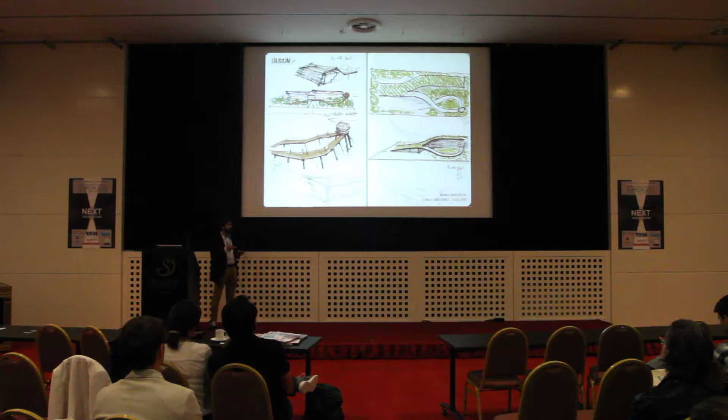So these are initial sketches showing our intention to use the whole site as a park and to use the water tower. And there were two other very important elements that we wanted to incorporate into our design. First of all, the inner street, like the one I showed you, the Long Bazaar, where all the inner circulation will be solved.

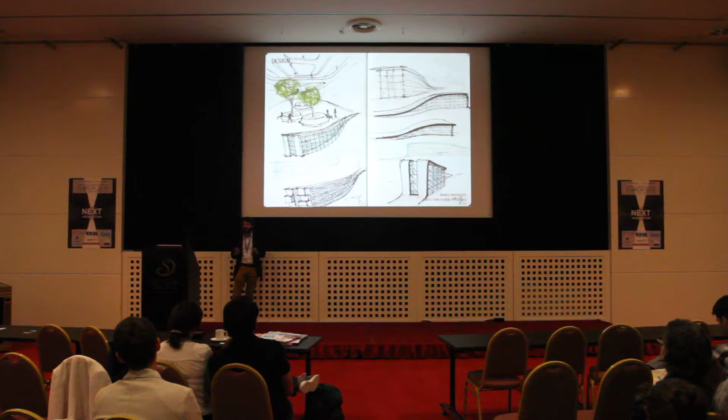And the second one is transparency, literally by means of a transparent glass facade connecting visually inside and outside, and symbolically emphasizing the transparency of the state apparatus, which is a bit problematic in Turkey, unfortunately.

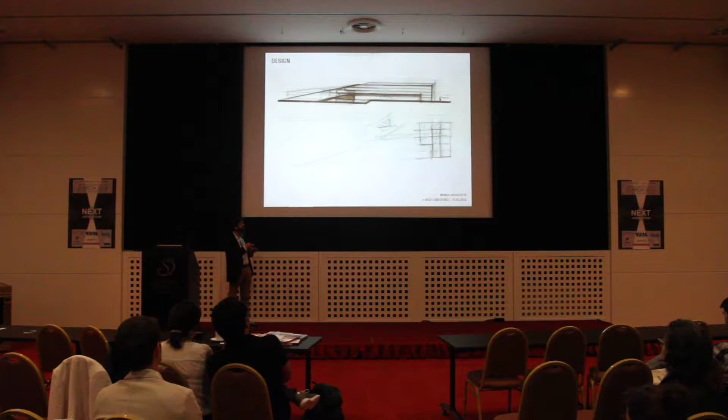So while developing the design, we found out that we could carve out 2 stories from the building mass. This is a section, and create a shaded colonnade, like in the traditional architecture. And in that way we could also visually connect the inner street and the park. So this is a 3-dimensional sketch of it.

And in the end, what we did was we sliced off the middle portion of the building mass and created a big atrium space, a gallery space above the inner street.

And we also lifted off this northern wing of the building by taking out the 2 stories here facing the park area. And then we covered the resulting void with transparent glass in order to achieve an illuminated interior as well as visually connecting inside and outside.

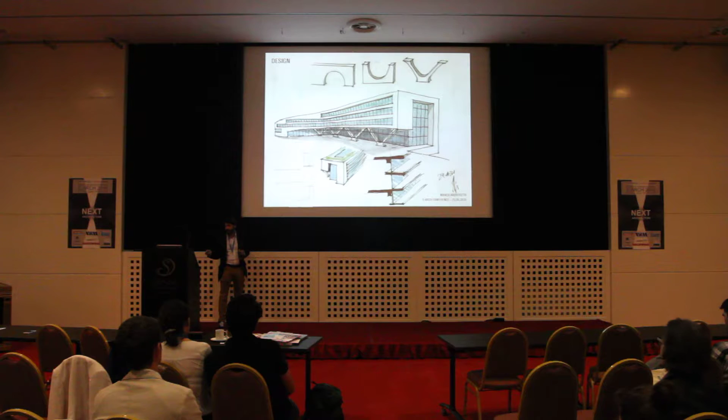So then immediately we started studying the structure. How were we going to support this flying wing, the northern wing? So we wanted to reinterpret the load-bearing arches of the traditional architecture, and then we decided on using the V-shaped steel columns and make a contemporary reinterpretation of the traditional colonnade.

And then we started studying the structure. We decided to do this flying wing with steel structure, and studied all kinds of alternatives with the structural engineer. By the way, this was not a conceptual design competition. We submitted structural, mechanical, and electrical reports along with the architecture drawings as well. And studying the structure also gave us other ideas about forming the building mass, like extending the top here.

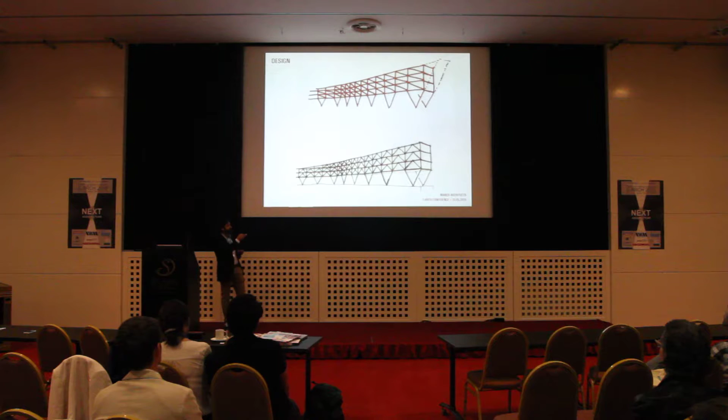So sustainability was one of our foremost objectives since the beginning of the project, and we wanted to achieve this, firstly, with a flexible and rational plan that would accommodate future needs in time. Secondly, with robust materials sourced locally. And thirdly, with minimizing the energy consumption with passive methods, not active ones mostly.

So what we did here was, in summary, we minimized the closed spaces. We kept the depth of office spaces at 8 meters to allow natural lighting and natural cross ventilation, and the air flows through the outer and inner facades into the atrium. And artificial heating and ventilation is only in these closed spaces. No heating or cooling in the atrium and open corridor areas.

And the atrium we covered with 1,400 square meters of photovoltaic integrated glass, which provides electricity and shading at the same time. We used green roof, which will provide the direly needed heat insulation as well as water absorption, while providing a habitat for local and migratory birds.

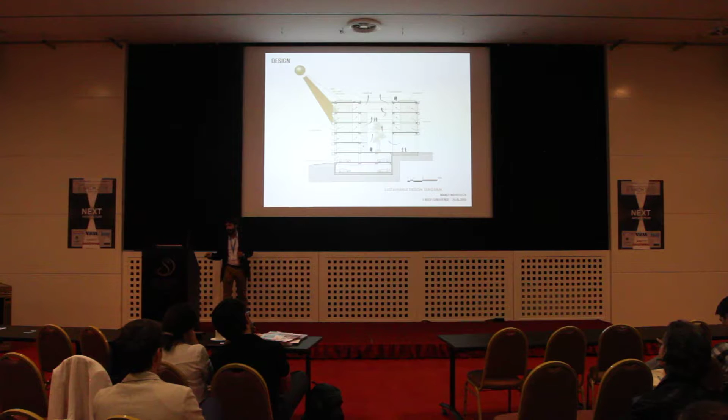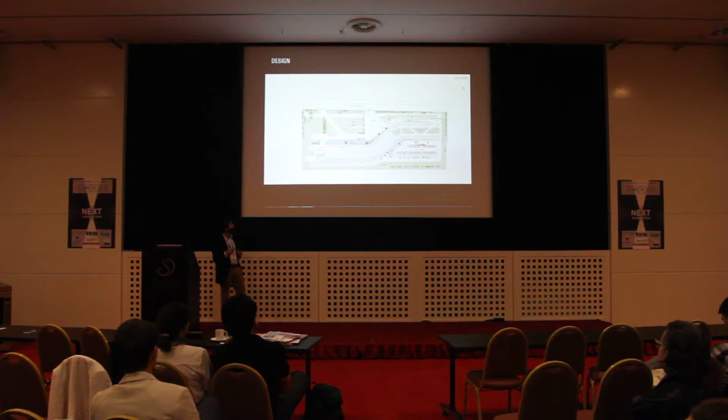And the southeastern part is for open parking and vehicle circulation. There is a shortcut public staircase leading directly down to the park area, and this water tower is turned into a sightseeing tower that I will show.

This is a circulation diagram. As you see, one can walk all the way up to the building top and then go down via those public staircases, open staircases. And then we structurally enhanced the water tower with steel and wrapped it around with spiraling staircases and platforms, so that it functions as a sightseeing tower, as I said.

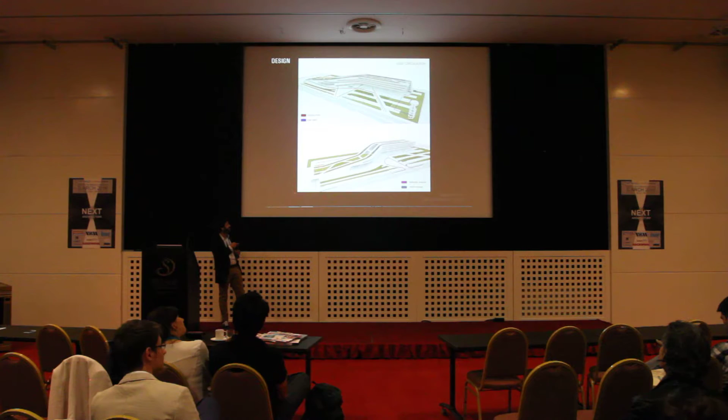And we restricted the vehicle traffic on the eastern end of the site, except for the protocol vehicles, which use it from time to time. We also created a shortcut path between the open parking lot and the pedestrian entrances of the building on the northern side.

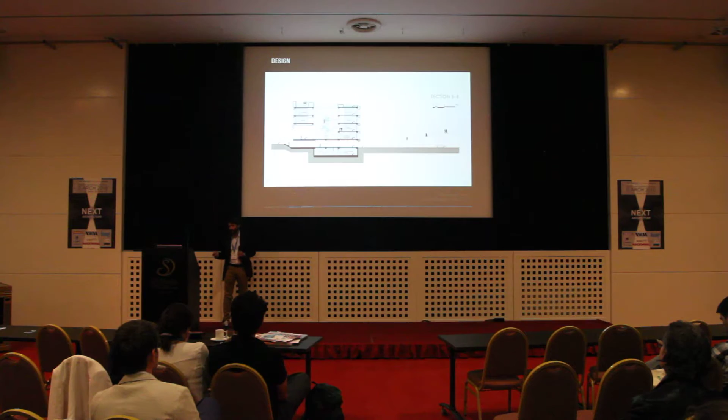And on this long section, you see how we achieve this sloping mass. We positioned the column-free wide spaces on one end, the foyer, the conference hall, and the committee rooms, without any extra stories above them, in order to optimize the structure.

And then the rest of the section goes through the inner street, and there you see open corridors, open staircases, and shortcut bridges between office spaces. And the inner street ends with a transparent facade to prevent a dead-end effect and visually connect interior and outside.

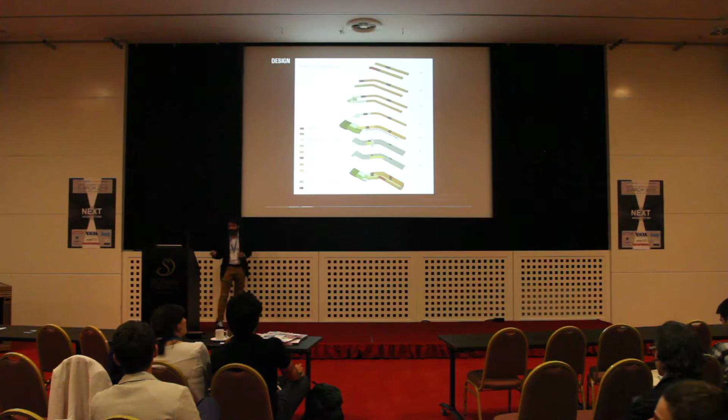And this is a diagram showing how the functions are stacked. So we grouped these 3,000 square meter committee spaces here, and the rest are the administrative spaces, 16,000 square meters. Very quickly, I'm going to show the floor plans.

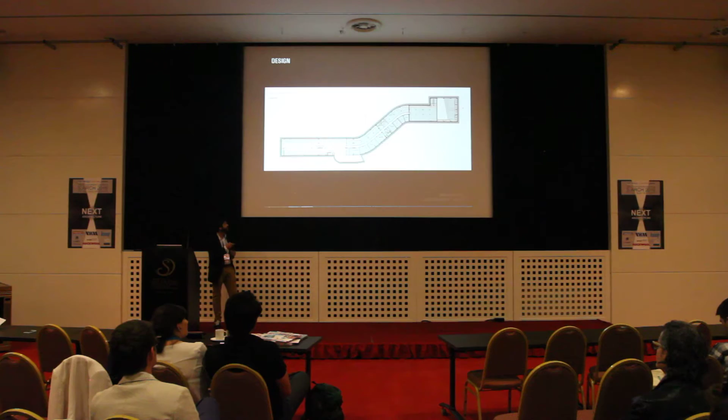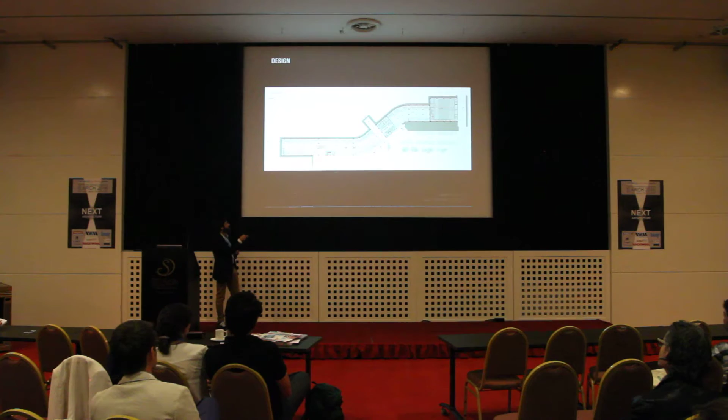This is the second basement floor, totally buried into the ground with technical spaces and garage and conference hall. It's the first basement floor, which is again a parking garage, directly accessible from the open parking area. And then we have the conference hall here. And here's the shortcut path going underneath the building towards the entrances for people parking their cars here.

And here you see the shaded colonnade that we created on this side of the building, which shelters the different entrances: the entrance to the foyer of the conference hall, the Provincial Council entrance, the protocol entrance, and the administrative entrance. And this is the shaded colonnade area. And here is the public staircase for going up or down from the green roof of the building.

So first floor, second floor, here you see the bridges that provide efficient circulation, and also provide gathering spaces, stumbling-upon spaces for people using the building. And on this floor you see we created a balcony here connected with the open corridor so that people can get fresh air, and they will use it for smoking mostly, actually. And then it gets bigger as you go up.